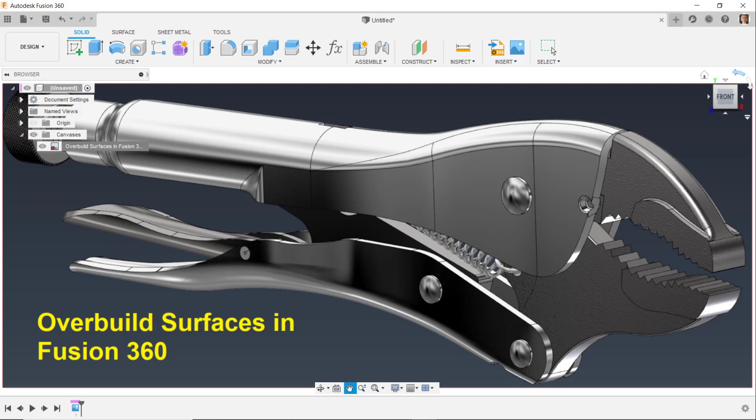In this lab I want to demonstrate how to reverse engineer and model up these locking pliers. I've already got some of the components created here, and I'll show you how to create the remaining components.

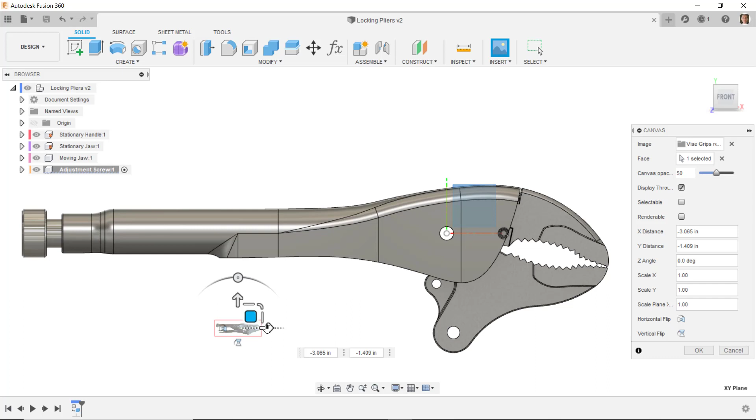The first thing I did is bring in an image of the example files. I'm going to scale that image up, so take your calipers and measure some known distance, like from here to the center of this hole. Notice I put the origin at the center of that hole, since this jaw will rotate around that location, so it makes sense to set that as the origin, or the midpoint of this vertical line. I think that's the most logical location. I need to scale this image up, so I started by putting this image in, and I'm showing you how I did that.

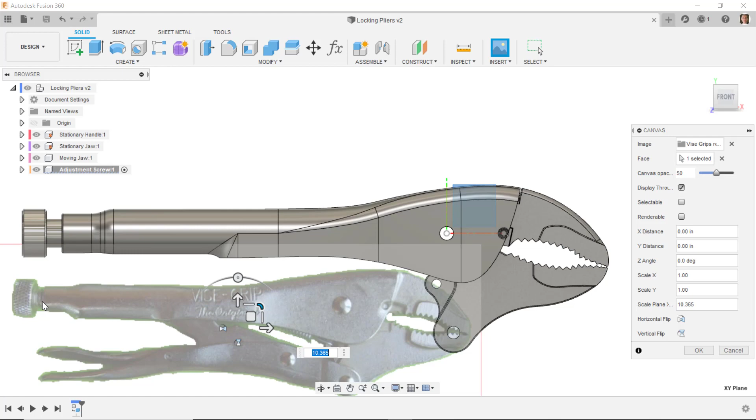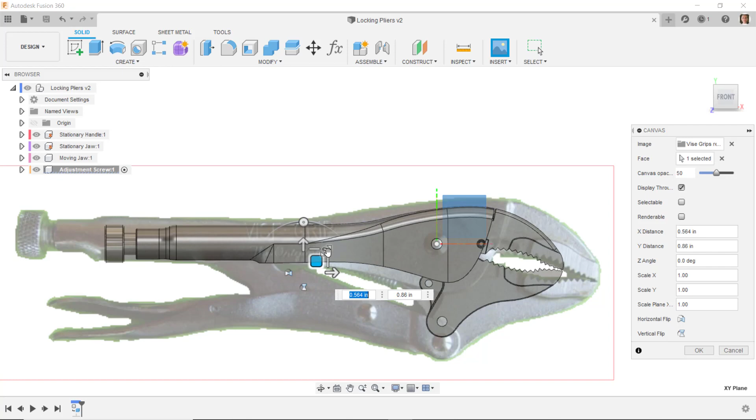You know the measurement from here to here, so you get the image to that same size. Don't take the image as something set in stone, because there's parallax error between the image and the real part, so we just use the image as a reference rather than taking dimensions from it. I needed to scale that down a bit, and you can type in numbers. You could do a measure on here, then put in a scale factor for an exact measurement, which is what I did originally.

Since I've already done some of the parts, I'm just going to eyeball this, and I said the exact dimensions. I shouldn't have said that. When you're working with an image, you're not going to have exact dimensions.

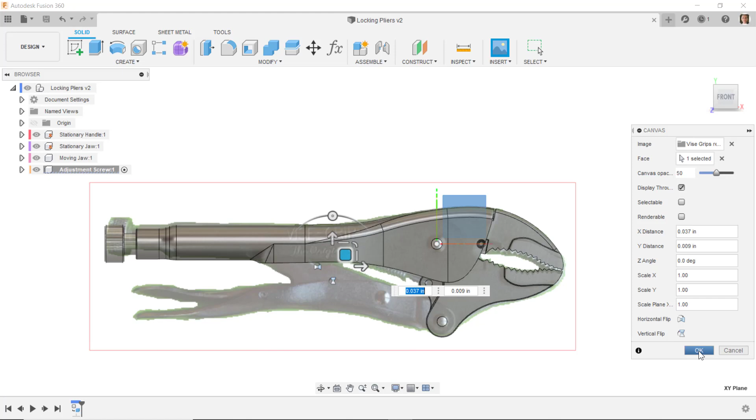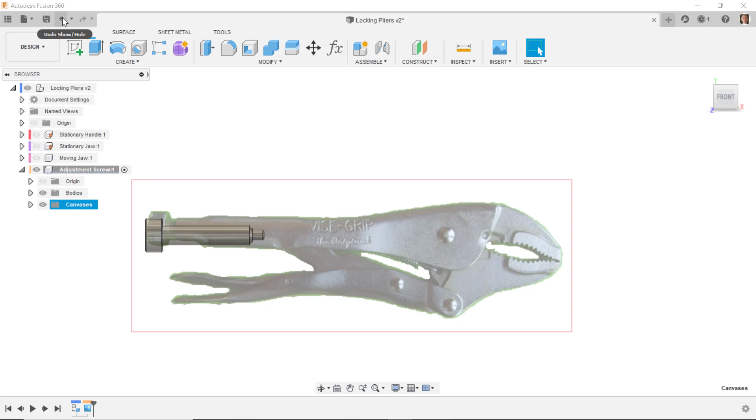If I put this image back before my existing geometry, and I'll create some additional geometry here, but if I turn off the beginning geometry we'll see the image. I actually put it into the wrong location, so I need to see if I can drag that canvas up to the upper level. It doesn't look like I can just drag and drop. Let's see if I can cut that with Control X. That really kind of irritates me that Fusion 360 is... well, we'll just leave it alone. I'm going to undo everything I just did and put this up at the top level.

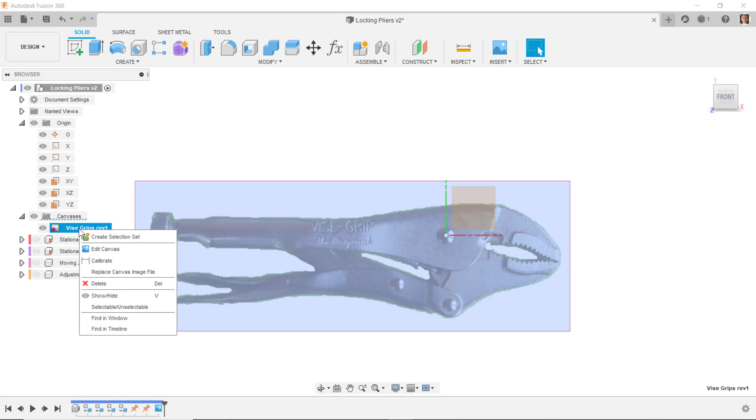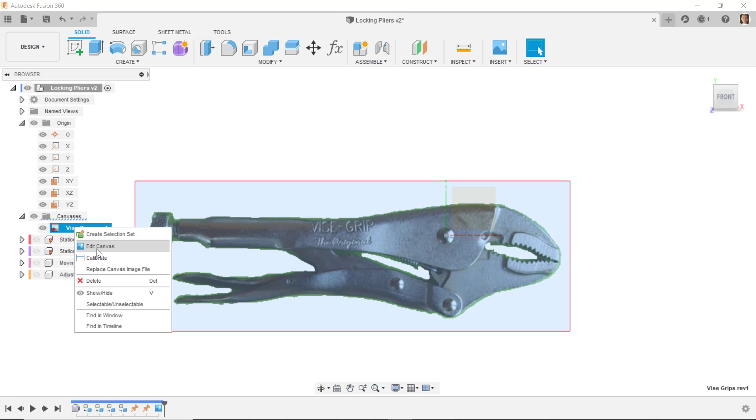I backed up and brought this image at the top level of the assembly as a canvas, and turned off the visibility of the components I've already started modeling. If I want to edit that canvas, I can right click and edit it, or calibrate it if I need to measure, say, a distance from here to here, and put in that distance to calibrate the image. I've already calibrated it by eye, so I'll leave it as is. If I wanted to edit that canvas, I can change the opacity so it's more or less visible depending on what I'm working on.

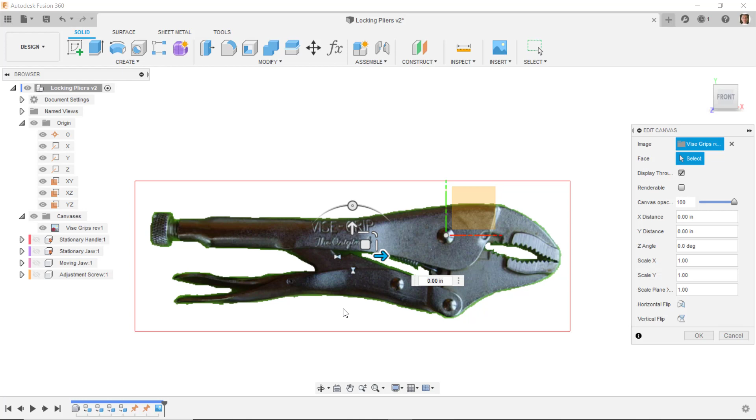Before I brought this image in, I cut away as much extraneous geometry and background as I could. I didn't have any special software to do this, so I just used Microsoft Paint. If you have Photoshop, there are better tools for removing that background. So I'm going to use this as my reference.

I modeled this part using a combination of the image and my calipers for precise dimensions, then I modeled this jaw again using the image and calipers, and then the screw. Let's turn off this canvas for a while, we won't need that.

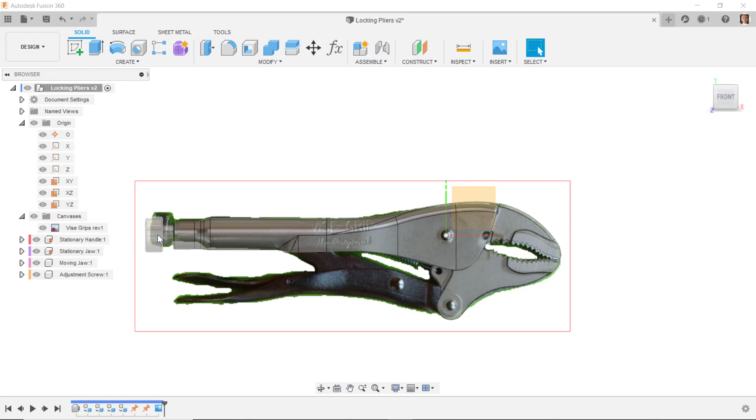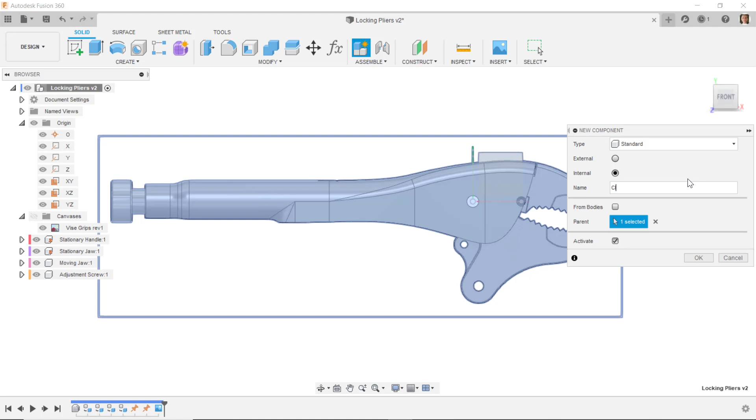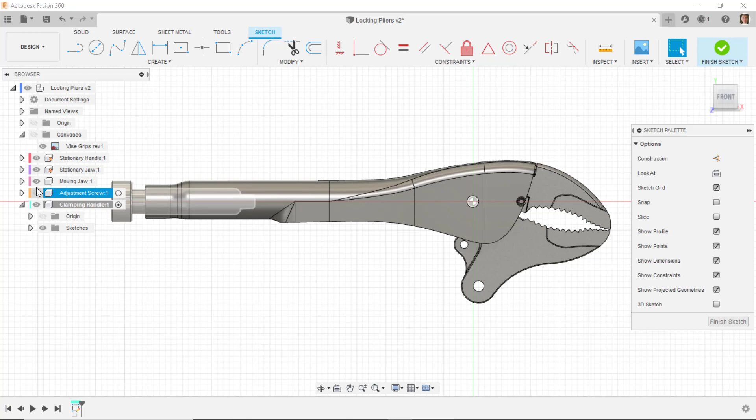I want to start making the next component that goes across here. I'm going to right click and create a new component called clamping handle. Make sure the clamping handle is your active component. I'll momentarily turn on the origin for that component since it's active, then start a new sketch on the XY plane in the new component. I can then turn off the visibility of that plane, and for now I'll turn off the visibility of the other components.

So this is my origin location, and I'm going to put a circle below the origin and to the right of it, and let's make that 0.1875. Now, even though it's rounded off to 3 decimal places, the software keeps track of it to the 4th decimal place. Then I'm going to locate that circle.

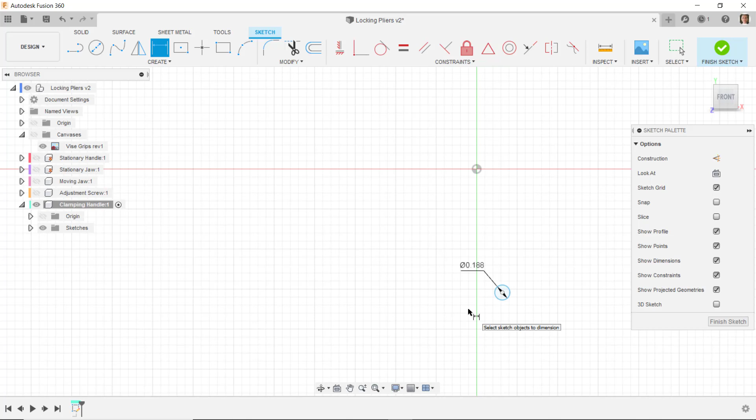So whenever I start a model, I draw one line or one circle or one rectangle, and I dimension that immediately for a sense of scale for the rest of the model. I'm going to dimension the distance from here over to here as the horizontal distance of 0.1. Then I'm going to dimension the vertical location from here to here as 1.475, watching the color of the circle after I dimension it.

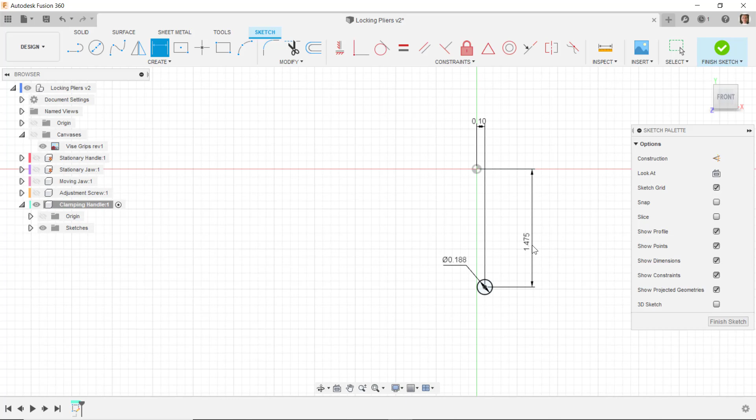And I just realized that I didn't check my units before I started, so I need to go to my document settings and make sure — in this case I'm going to use inch units. Make sure your document units are set up to whatever units you are going to use.

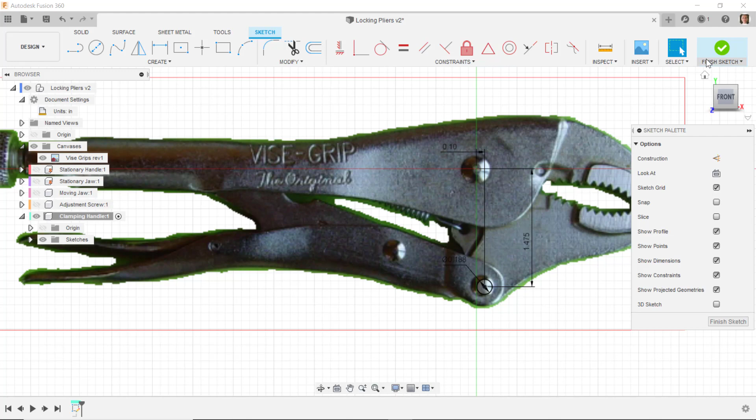Now, if I turn on the visibility of the canvas, what I just did is put in this circle for this pin right here, over 100 thousandths, or 0.1, from this point. So you can already start to see that the image itself just serves as a reference, a guiding reference — it isn't the precise geometry. I use my calipers to try to measure as best I can the actual geometry.

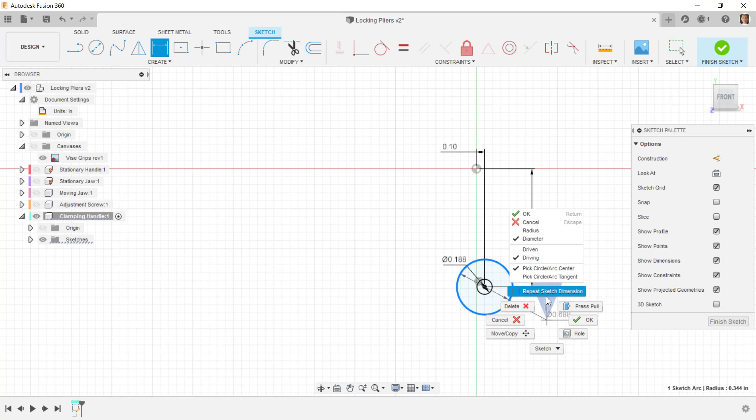I'm going to draw another circle at the center of this circle, and I want to dimension this as a radius. So I'll right click and do a radius dimension, and I'll make that 0.3 radius.

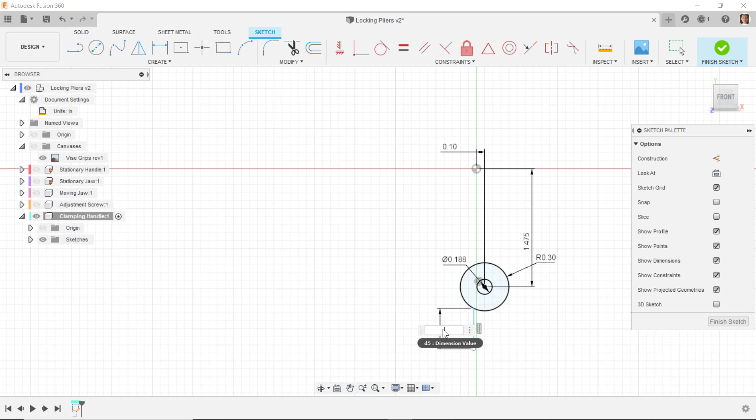I will then draw a line coming down from this circle, and I want to get over to this side of the center of the circle. All of our geometry so far is black except for this line, which we need to dimension. I'm going to dimension the length of this line at 0.265, and dimension the distance from here to the center of this circle, that offset distance, as 0.078.

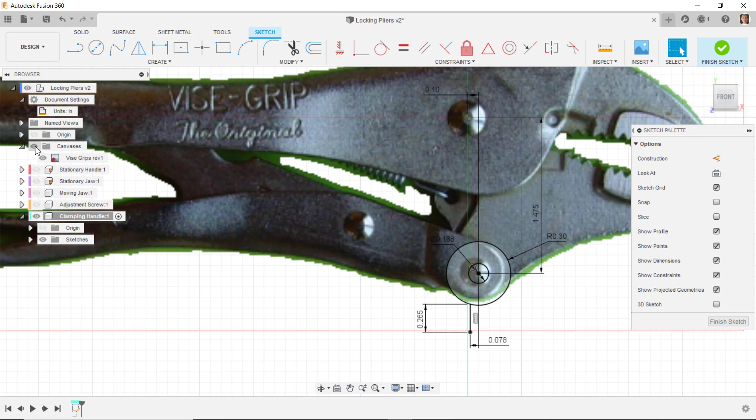Now, if I look at the canvas, it might not be apparent why I am putting this line right here, but we're going to trim off some geometry in here, and we'll see in a little while why I put that short little line in. So sometimes we have to use some logic in our design process when we are reverse engineering from existing geometry.

I'm going to then put a line on this arc, and I'm going to hold the mouse button down — I don't let go of it. Notice as I drag this line around, it's going to put a tangent on there for me automatically, and I'm going to come up to about this location. I'll then move my mouse away — though I don't actually need to — and click and hold the mouse to draw an arc about like that, then come over and draw a line about like that.

Now, I probably shouldn't draw so much geometry as a beginner until we get better at this, but I want this line to be tangent to that arc. So I'll make this line tangent to this arc, and I'll put some dimensions in here. I'm going to dimension the radius of this arc as 1 inch.

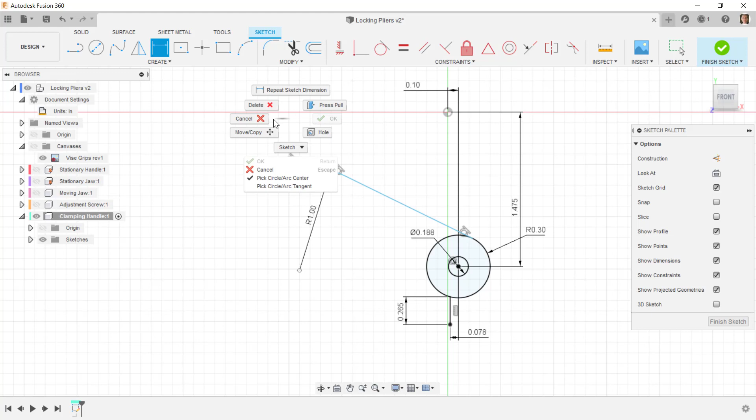And if your geometry really starts to become unwieldy, instead of having 3 unconstrained pieces of geometry, just do them one at a time. If I turn on the visibility, you can see what I'm trying to do — I'm following along this curve right here — so I'll put in my dimensions then for that geometry.

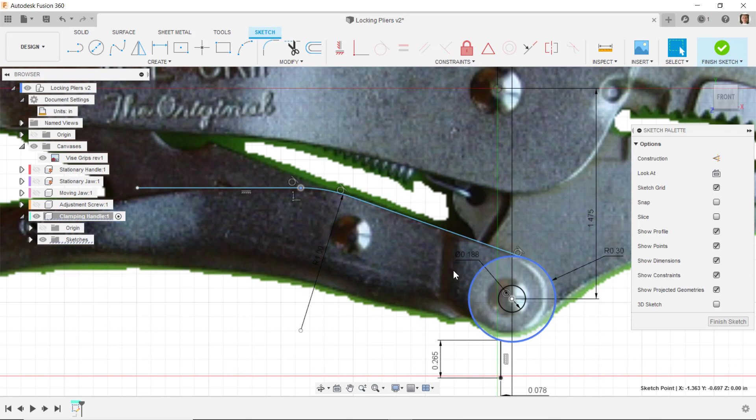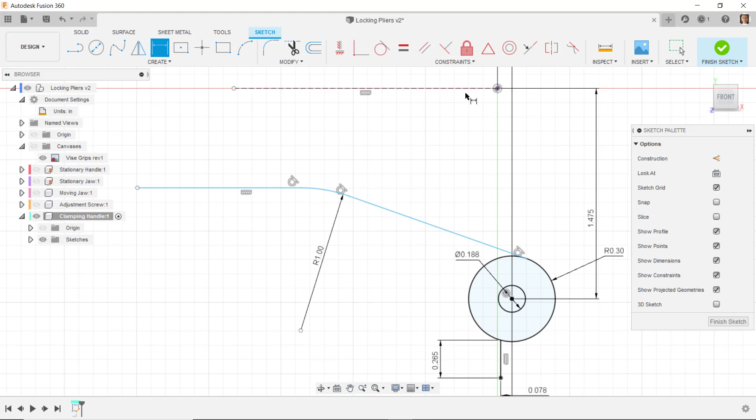So I'll add an angle dimension, and actually I want to put in a line here that I can use as reference. So I'm going to put a horizontal line across here, and change that to construction — right click and change it to a construction line. I'm going to dimension the angle from this line to this angled line as 20 degrees.

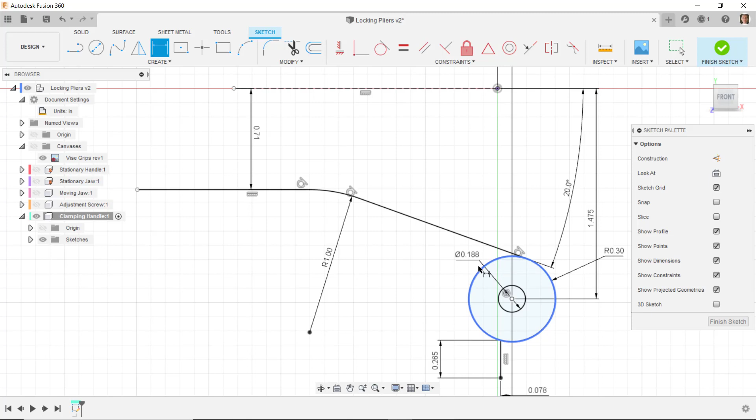I'm then going to dimension the distance from this line up to this construction line as 0.71. So we see that all of the geometry up to this point, except for this white dot, has turned black. I'm going to trim off this geometry down here, so I'll select that circle to trim it off, and then we'll continue modeling along.

And now I should save frequently. You could have a crash, or the power could go out. You don't want to lose any work. That's a real beginner mistake, to ever lose any work. You should never lose any work.

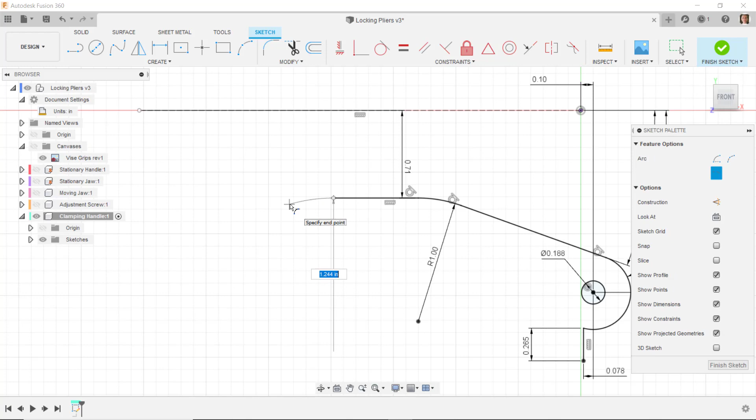Let's turn on the visibility of the canvas again, and I'm going to drag this line back to about here. I'm going to do a tangent arc here and some additional geometry. Under create, I'll go to arcs and do a tangent arc, select this point, come down to about there, then do another arc and bring this up in the other direction, and do a third arc bringing this one down in this direction.

If we look at the canvas, we can kind of see where I'm going with this. So this arc is going to be down here, and this arc will be here, then this arc, and then this arc. It'll be easier once I start putting some dimensions in here to control that.

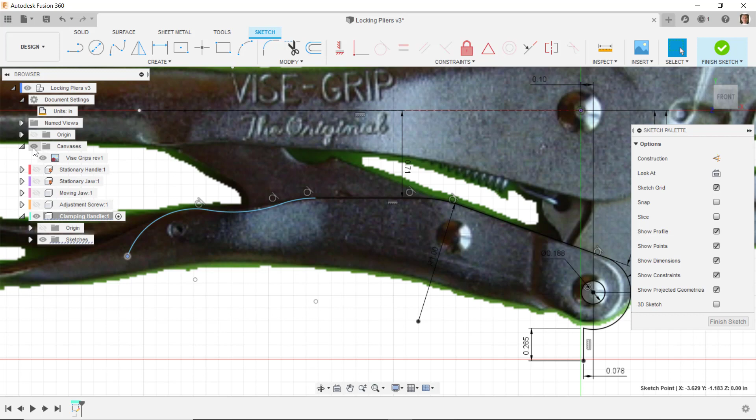Let's turn off the canvas, and I'm going to dimension this arc as 0.735. I'm going to dimension this arc as 1.735.

I want to put the location using a few dimensions, so I'm going to undo that one, and before I put that one in, I'm going to locate this point. I'll dimension this point from here over to the origin, that horizontal distance, as 2.01.

Okay, so now that's black up to here. I'll dimension this location from here over to the origin, and I'll do that as 2.8.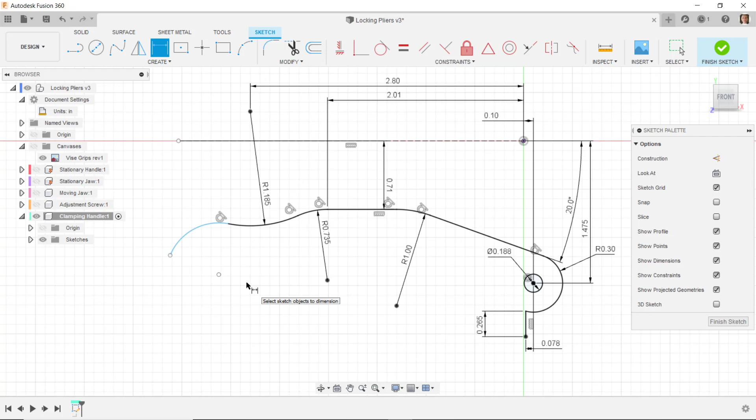Now if I change the radius of this dimension, it will be better behaved as far as predictability of what's going to happen. So I'll do 1.735 as the dimension of that arc, and then I'll dimension this arc as 0.95.

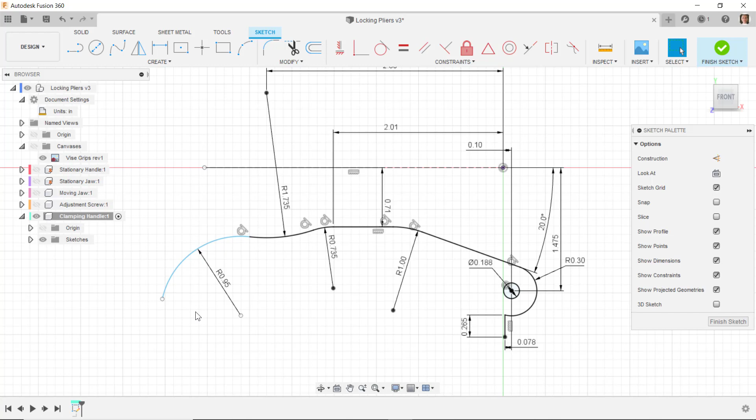Okay, we can compare this to our image again, our canvas. So this arc, I'm going to bring this back in here someplace. We'll do another arc, and we'll come down along there.

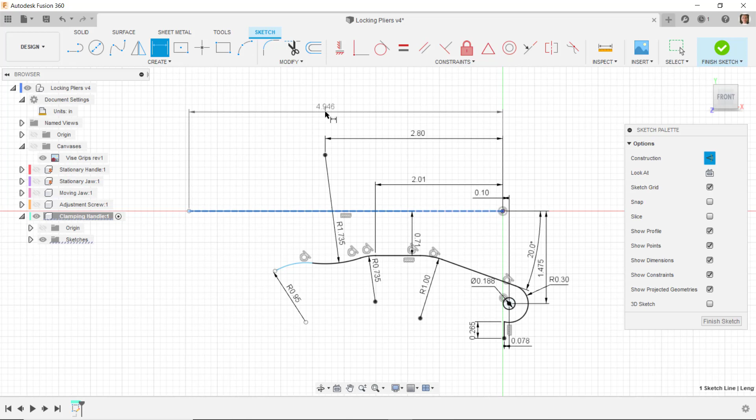Sometimes it works best to tackle from two ends, so I'm going to drag this line over a little bit, and I'll go ahead and put an overall length on that of 5.65.

I'm going to draw another line coming down horizontally or vertically from this line, and I want that to be a construction line also, so I'll change that to construction.

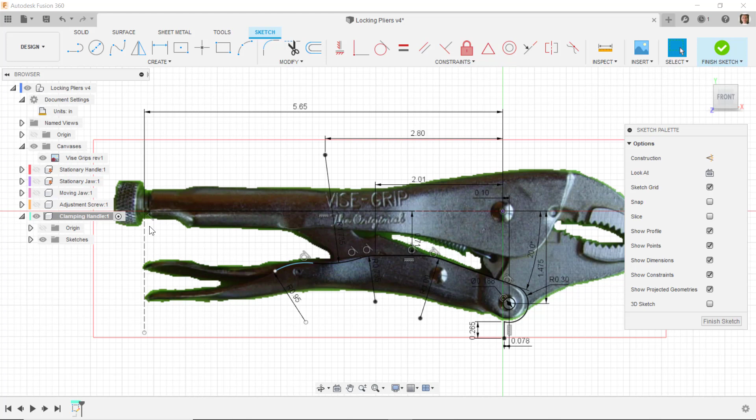If I turn on my canvas, that's approximately the end of this component right here, and I can measure the distance from here to here pretty accurately with my calipers. So I go more by the caliper dimensions than by just looking at the image, but the image helps to keep you honest so that you don't totally miss some function or some dimension of your geometry.

Then I'm going to draw a tangent arc. If you do certain commands all the time, you may want to click here and pin those or put those in your shortcuts to make those faster to access.

I'm going to do a tangent arc off of this one, and I want this one to come about like this, then another tangent arc coming off about like that. I'm going to make this arc tangent to this construction line.

I'm going to go ahead and dimension this arc as 0.11, and I'll dimension the radius of this arc as 4.47.

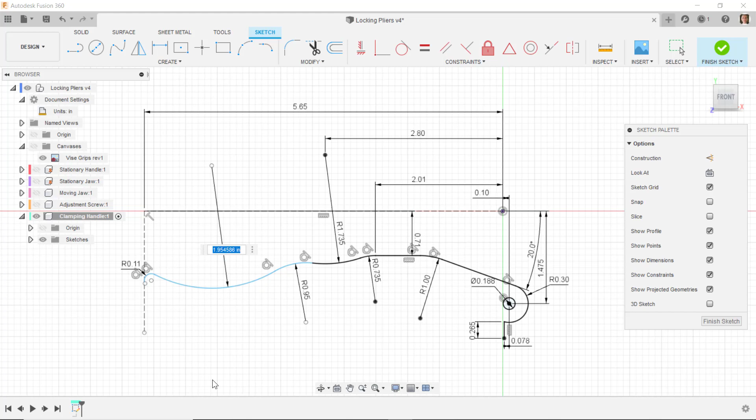I'll then dimension the horizontal distance from here back to the origin, and I just realized as I was putting this in that I missed a particular arc that I want to put in here, so I'm trying to decide how I want to recover from that, but I'm going to make this dimension 5.31.

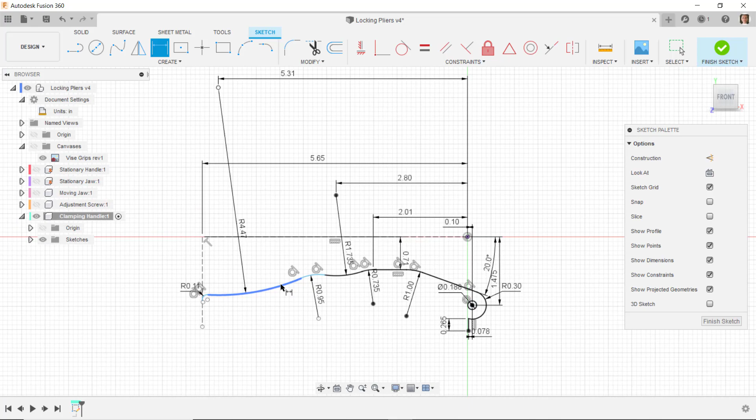Alright, so I actually meant to put an arc in between here and here, and I'm not sure the best way that I can recover from that. Here's the point. I think what I'll do is I'll just draw a circle in here, and I will trim out this piece and this piece, and then I'll delete that circle.

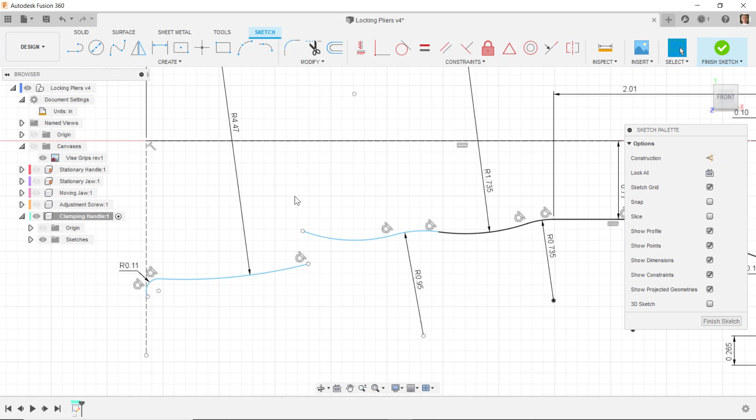I'll want to put an arc in between connecting those two together, so I'll do a tangent arc. I'm going to click from here to here, and I want this to be going up with concave, so I'm going to connect those two together. This arc and this arc are two different radii, so I'll go ahead and dimension this one, and this one is 3.36.

And when I did that, everything blew up on me, so I'll have to come back and figure out a better way of getting these dimensions in.

Let's first put the location of the center of this arc from here over to here, and that will be 5.09. And that caused everything to blow up.

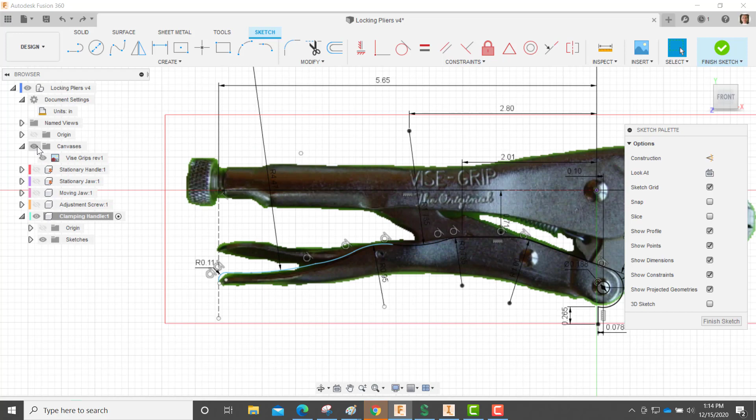So I'm going to back up a couple of steps, so I no longer have that dimension in here. Let's turn on the visibility of the canvas. I'm trying to get, so this is one arc, a long arc here, and this is another arc in here. I'm trying to get all of this in here.

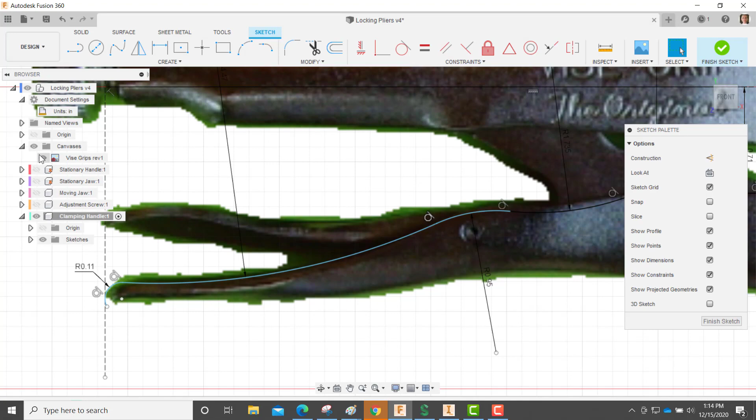I'm going to drag this closer down to where it should be. And let's see if I put a tangent in there, so let's do tangent between this one and this one. That was better behaved, and then let's see if we can put in the dimensions.

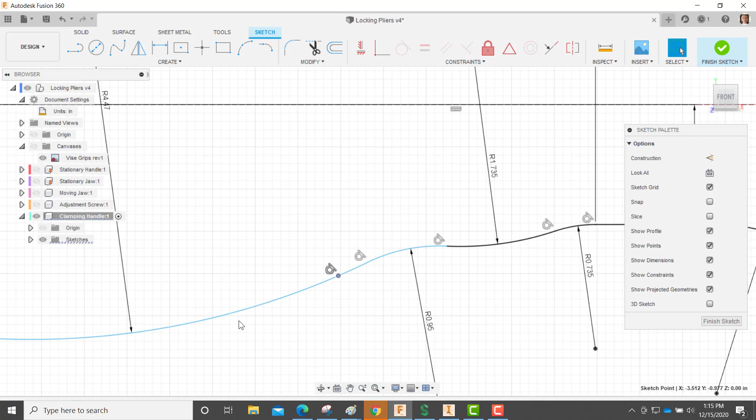So I'll do the dimension again, and I have a short little arc in here someplace that I've lost, I'm not sure where it is. Let's drag this down, and if I have too much trouble- here it is. If I have too much trouble, I might just take this arc out and then put this one in by itself. I probably should have stayed going along that same path as I was putting this in.

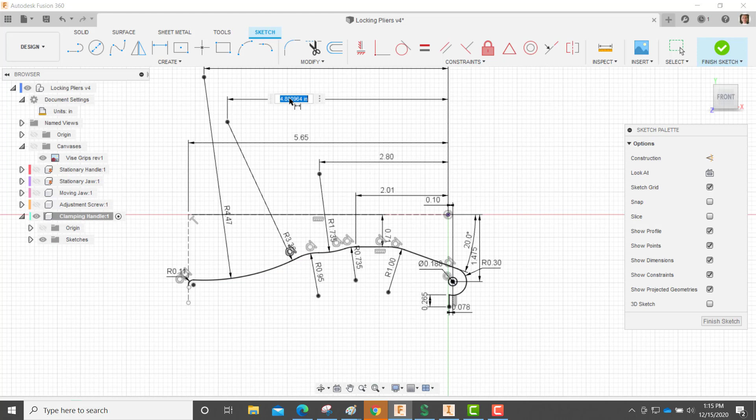So this arc is 3.36, and then the distance from here over to the origin, that distance is 5.09.

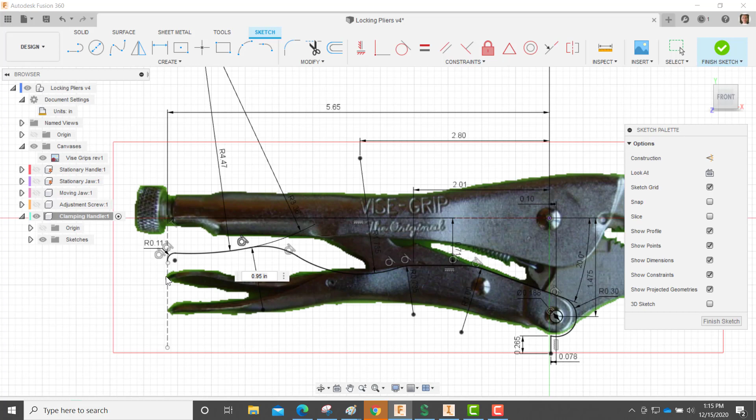So I was able to recover. I still think I have a mistake in here someplace, because the geometry isn't matching what I was expecting. This was supposed to be down here, so I need to figure out where I've gone wrong and fix that.

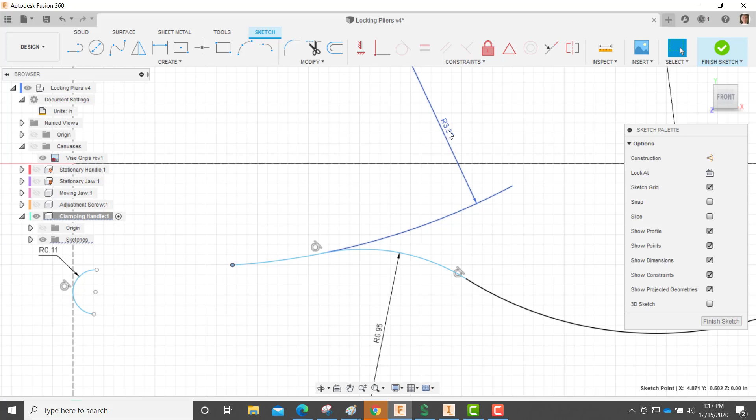So I have this arc, and then I'm not sure where this arc is underneath this one, so I'm going to delete one of the arcs and put it in again. I think these arcs are actually on top of each other. This arc was just a small little segment, so I'll put that in that location.

Let's turn on the visibility of the canvas again, and let's get these down here where they're supposed to be. So this is supposed to be back here, and this is right in here, and then I'm going to move this arc down here.

I'm trying to be careful that I don't want this point to actually snap to that line. Maybe I should just leave that alone. There we go, I'll leave that alone for now.

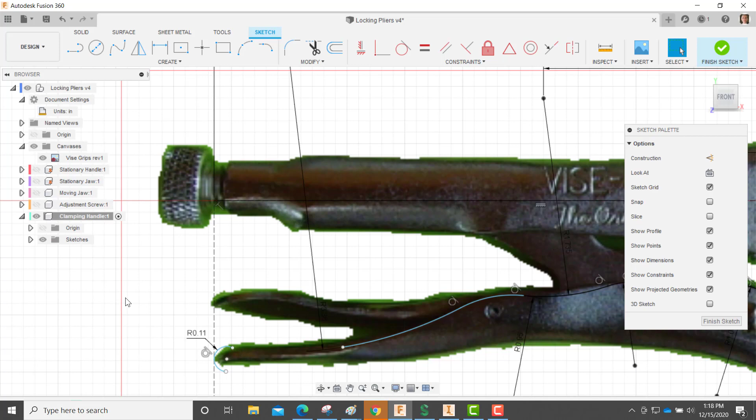And then I want an arc connecting from here over to here. So I would like to get this shorter, so we'll get that back into here. Let's turn off the canvas, and we'll put in that next arc.

So I have this one 5.09 from the origin, and the radius 3.36. Let's do another tangent arc. I'm going to go from here over to here, and I want it also to be tangent at this end, so I'll do tangent between here and here.

And then I want the center of this arc, or the radius of this arc, to be much larger, so I'll select the arc, and I'm going to put in 4.47.

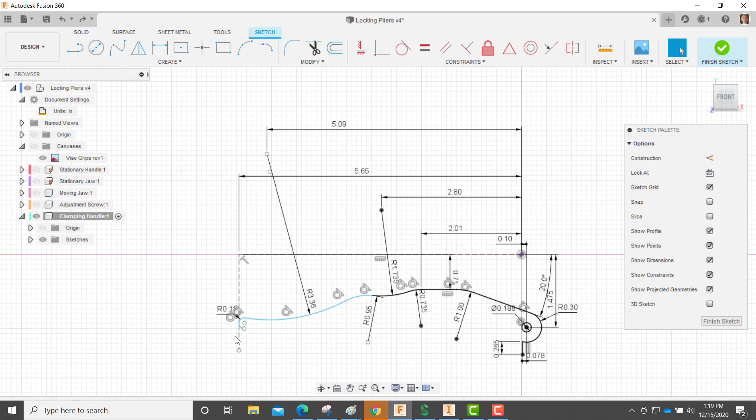And again, that caused my sketch to become poorly behaved. So let's undo back to where I put that dimension in. Perhaps if I can locate this point, then I can have better control on this sketch.

So I'm going to dimension the distance from the center of this arc up to my construction line, and I will do that as 1.515.

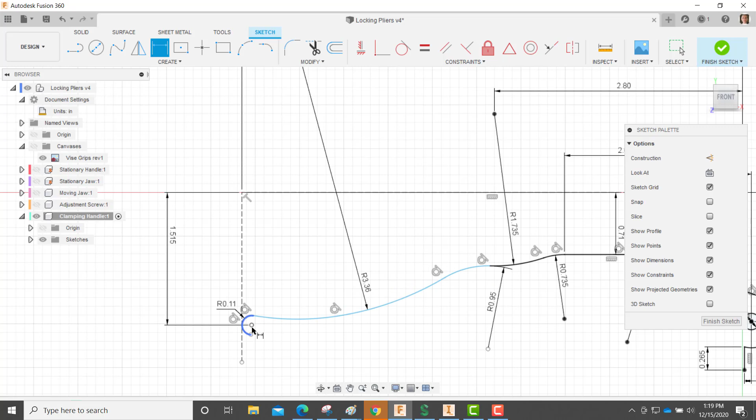Okay, so now this sketch turns black, it's fully defined. I'll go back to my canvas, and I see that I need to drag this geometry up, so I'll get this point, I'll drag this point up, and I see that I've actually made a big change from this, as far as I move this down further than where that was located originally with this 1.515.